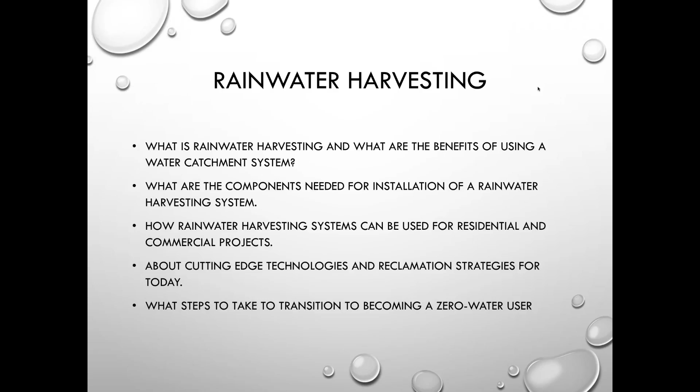That's one critical contaminant, but more so around the globe, it's really from deforestation and not letting the water percolate. So keep in mind that all those streets and infrastructure have a lot to do with it. Just allowing the opportunity to naturally progress back into the aquifer is a big deal.

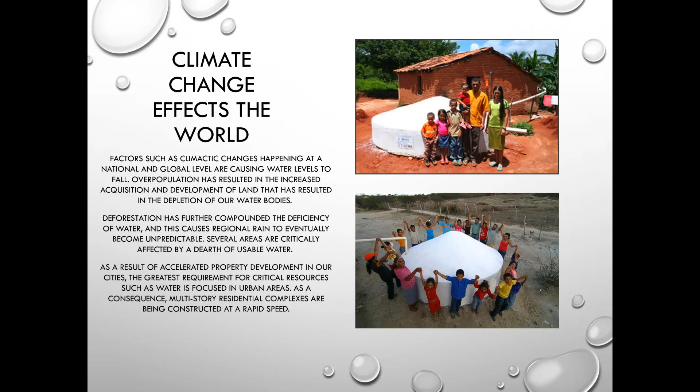So really the truth about rainwater is the strategy to maximize the natural resource, trying to minimize our environmental impact as much as possible. But the urban water situation today is more critical than what you see in rural areas, simply because of the massive infrastructure changes.

Down on the bottom, you'll see more of the factors, such as climate change happening, overpopulation, especially so much more towards India. Some of the more rural areas are becoming more urban, in places like Brazil, South Africa, and obviously in some of the densification processes here in the United States and throughout Mexico.

So multi-story residences and complexes have started to be constructed at a rapid speed. What I mean by rapid is, think about water that could naturally percolate by hitting the ground, puddle, and then saturate into the ground, versus hitting the top of a multi-story building, let's say 30 stories, and by the time it actually comes down the effluent pipes inside the building, it's running at a very rapid speed. So when we can collect rainwater or stormwater in those scenarios before it really goes into the aquifers, and reuse it on the same environment, it's a lot more conducive.

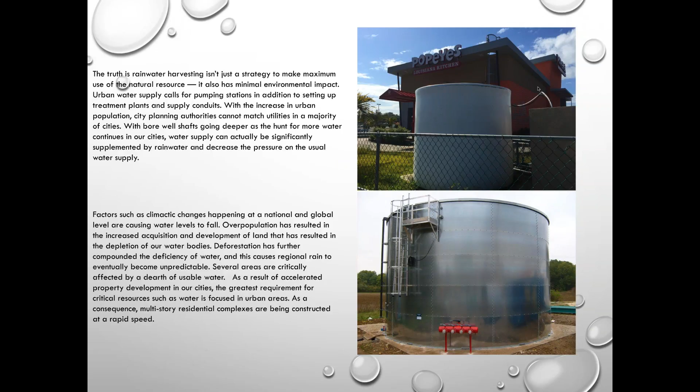So let me tell you a little bit about some of the knowledge that comes from this. When you look at the European Union, and specifically at countries where rainwater management has become a very natural everyday process, we could talk about Germany. Economics, centralization, government—everything's very similar to the U.S. The reason I bring up Germany is, since 1989 it's been the law there that if water hits your land, you either have to allow it to percolate slowly back into the natural environment, or you have to reuse it on your property. That's a federal mandate, which we don't have in the U.S., but you're going to see a lot more of this in municipalities around the country.

As Angela spoke about earlier, she lives in a part of the country that had an extensive 5-year drought, and now they're having tremendous flooding and runoff, which has created a catastrophic, earth-changing event—worse off, it's changed the naturalization of the property and the lifestyles people are used to. I live in the southeastern part of the country, and for about 6.5 years we had a really nasty drought.

So when you look at things like rainwater management, it's a very underutilized process, especially when you look at the non-drinking factors of it. The non-drinking factors would be more specific towards: it eliminates flooding or decreases it significantly, it decreases a lot of groundwater runoff into the stormwater that has to be treated. That in turn creates a little more or less strain on our drainage system, but less strain on the drainage infrastructure as we go through. So the groundwater levels and recharging really aid in enhancing the property.

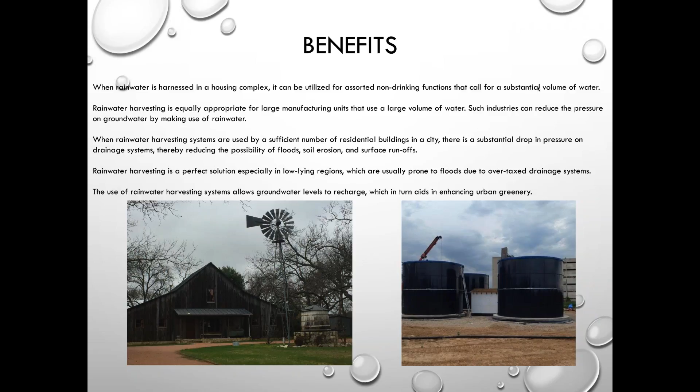One of the things I've always been asked about rainwater harvesting is what do I need to do it really well. Obviously if you're just using it for irrigation, a lot of people just catch water and go use it. I take myself back to something we talk about at work, the petticoat junction tank, which is just an open tank where you dip a bucket in and go about your business. Well today there's so many pesticides, herbicides, and other chemicals in the air that having something exposed really isn't a forgivable type of event.

So what we talk about is rain harvesting system components, having the right pre-filter. That's important because if you're going to have a tank, you want it to last a long time. The pre-filter breaks things down, leaves, debris, things flying in the air or hitting the substrate, whether it's the top of the building or house, and it washes that debris away. Today these types of filters are very efficient in what they do.

They don't lose a lot of water, but they flush a lot of that big debris away as it enters the system. You'll see on the PowerPoint, number 2 is the calmed inlet. A lot of people don't understand that part. A system is always going to have some level of debris that gets in the tank. Once it hits the bottom and settles, it creates an anaerobic material that's very good for the water, almost like a live bacteria. If it's not constantly turned up, it makes that layer on the bottom of the tank or cistern, and anything that gets in there continues to dilute down and break down through the water cycle.

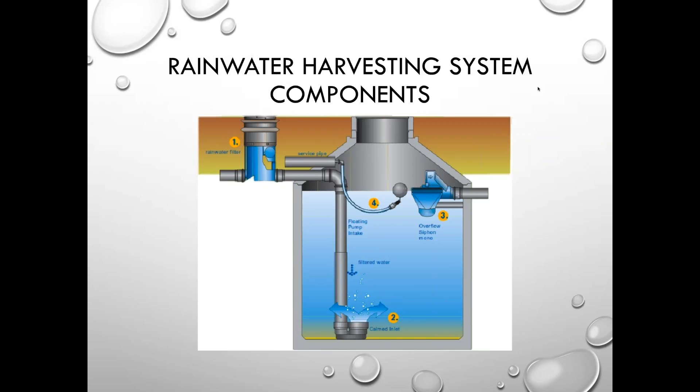Number 4, in this particular illustration, is a floating extractor, usually taken down below 500 microns. The water that comes through there floats beneath the surface but above the bottom, and it takes the cleanest water out of the tank all the time. That part of the tank is usually almost debris-free if you were looking at it under a microscope. So that gives you the opportunity to really get the best optimal water level out of the tank all the time. Our next slide is going to break that down.

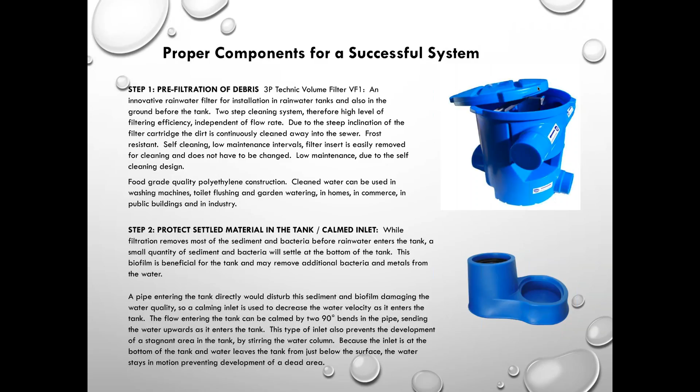As it does all the time, it constantly gives you oxygen in the water as it's splashing inside of the tank, giving you the ability to oxygenate the water. And anybody who knows anything about water knows the more oxygen, the cleaner and purer it's going to be.

The floating filter hose and the overflow siphon are a little different in this picture, so you can see them a little bit easier. You can see the floating extractor in the ball. The ball can be used in two different manners. A lot of times people will just let it float in the tank, especially on a shorter hose, so the ball will never touch the bottom of the tank, even if the tank were empty. The extractor wouldn't even lay on the ground—it would still float up off the floor.

Or two, you can tie a tether onto the top of it, making it so it always floats at a certain level in the tank. That way it maintains a certain type of environment. Both work well as you do water testing on a tank. The biggest ability is to make sure you use a calmed inlet so you don't have any extra debris floating around from the anaerobic stir.

In that protected overflow, or what some people call a siphon overflow, the pipe on the left-hand side literally sticks outside of the tank, and that's where you connect your drain pipe. As the water level gets too high, it overflows. On the right-hand side, you can see it's cut off at about a 45-degree angle, so it skims water as it comes closer and can take debris off of it.

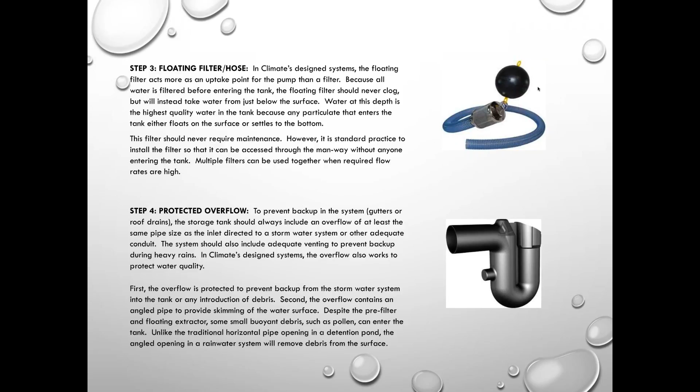So there's a lot of things that go into this type of technology. But again, it's a far cry from what we saw with the original ones, where water really goes into a concreted cistern that's not even protected, not even with a paintable surface. These are just going to give you some quick overviews of what tanks look like, kind of a snapshot of something in the industry today.

This is a regular steel galvanized tank. Some people refer to them as grain tanks. They basically have liners inside of them, and they can be made into all kinds of liquid storage—rain tanks. You can keep other types of chemicals or corrosives in them. You can keep oil in them. You can keep pretty much anything inside there as long as you've got a license for it.

As you can see on this particular one, it's just a clean looking tank, and they typically last between 20 and 30 years in the weather with very little maintenance. This system right here is about 2,200 gallons—easy off of a nice roof, clean.

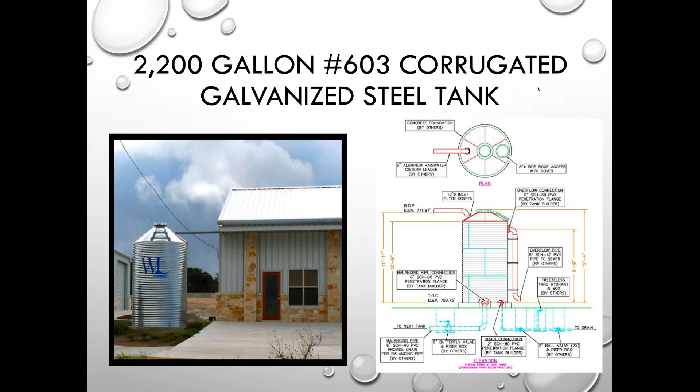Here's another look at another tank. It's about a 5,000 gallon tank. Again, it's a very easy installation. It's on an office—very clean, very sleek, very easy to work on, very low maintenance long term. And like I said, a tank like this typically will last between 20 and 30 years, as long as it's looked at by a certified technician on a yearly basis.

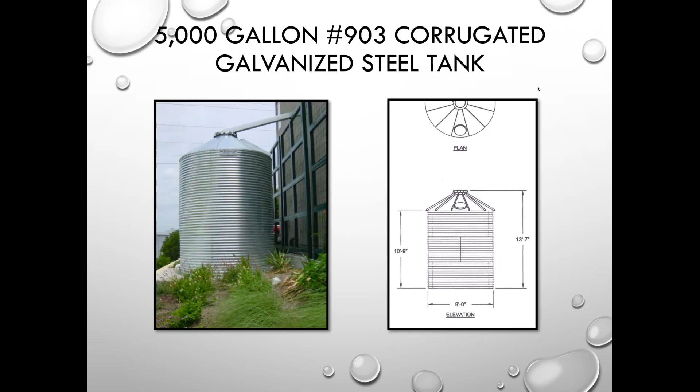Well, let's get more into the commercial and residential, because I think that's where the body of our phone calls are from. So commercial and residential—the biggest thing I want to talk about here is making sure you take the precautions to have locking lids.

Oftentimes, I have children—I'm sure that most people on the call do—and people like to climb on stuff, especially something that looks like a play toy. So you want to keep the lid locked, obviously, because of liability situations, and obviously someone can get hurt. But the biggest thing about it is not so much that—it's the breeding of mosquitoes and insects in the stored water. When this lid is closed, as the picture shows on the far right versus the far left, that tank literally will take in water and it can stay in there almost indefinitely. The light kept out of it keeps algae from growing in the tank, keeping it from having to be treated. Also, with the tank being closed, it has very little insects in there.

So why do people use these? You can see a lot of non-drinking purposes, which would be irrigation, car washing, laundry, toilet flushing—these are everyday common practices. You'll see from the middle picture in the slide, this is a typical scenario where a school will send us a blueprint and say, hey, we want to put a rain tank on, and we kind of want to do some stuff.

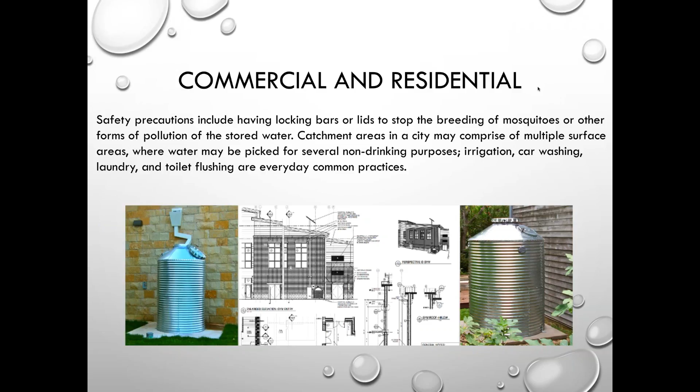These are also very practical for homeowners, and very practical around the office. You can come over and fill your water up and water all your house plants all you want. House plants and landscape plants love rainwater because it's virtually chemical free and debris free, so it's very easy for them to use.

Let's talk a bit more into the depth of technologies. We're back to square one on the left, where this young lady is doing something she has to do every single day, which is hand pump water out of her concrete cistern. These cisterns are built from the ground up on her property, every facet of it. This is one of my favorite types of projects to work on around the world, and it brings me back to the root of what we really do this for, which is helping lower the ecological footprint of the way people use water around the globe.

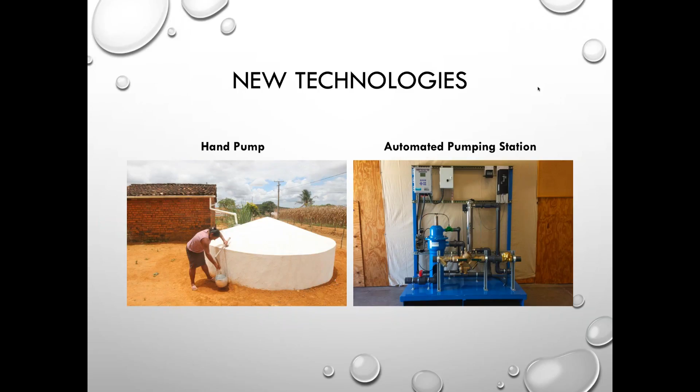New technologies sometimes are still very simplistic. These are more of the high-end technologies around today. This happens to be a brand, and there are lots of them out there. This particular one I'm really engaged with. We actually install a lot of them and talk to a lot of clients about them. Very popular product, and what it does is take water in through the cartridges.

What's left could be live bacteria that still exists, and it will be eradicated inside the UV bulb. The coolest thing about this new technology is that it uses very little electricity.

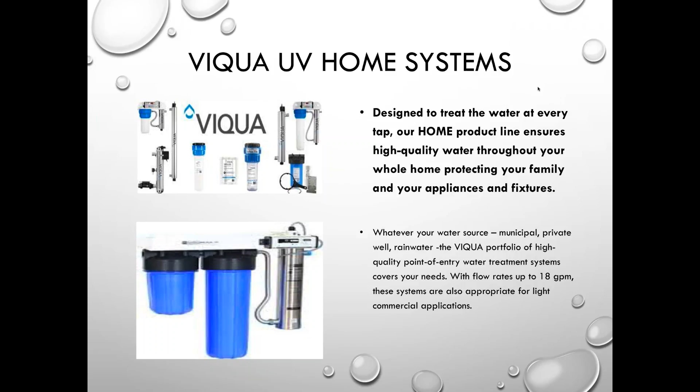This will show you a little bit more of what the professional series looks like. The professional series really has a longer lifespan, the bulbs last longer. The little meter on the front of the black box that says VIQUA on it is actually a countdown calendar that, when you plug it in and it becomes activated, tells you to the day when that bulb should be replaced by manufacturer specification. So it's constantly monitoring the system.

This system's a little bit bigger. As you can see inside of the silver tube, that's where the UV bulb is. Very safe product, and works extremely well. Reason why I bring this up is because this is not necessarily new technology. It's new to this century, but it's not new. Its newness is it's become very affordable on the market today to add to your rainwater system.

The reason why I say this is because a lot of times we have conversations with clients and people will say, well, how much rainwater storage should I have? And the ultimate answer is no matter how much you have, you're always going to want more, which is a really cool thing. So you always want to size your UV system for all practical uses, not just the uses that someone would have originally.

These cartridges on this side are basically the same, except they're larger, so they take in more volume because they need to have more volume through the bulb. Just make sure that the gallons per minute, the GPMs, are actually kept up. As you get more water inside of it too, it gives you the ability to have more of the filtration surface area inside to attack more of the water quicker. So not only does the filter become more efficient, it lasts a little bit longer.

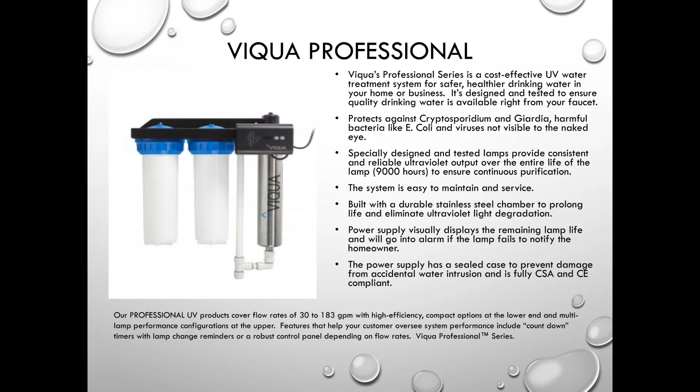Again, you always want to check with your manufacturer to find out what the specifications and recommendations are, but these filters are basically meant to last no more than 90 days, and the bulb's usually around a year. So that's a practical application for most people.

Some of the other new technology that's out there: instead of having a concrete tank under the ground, now they call it FRP, which is fiber reinforced plastic. Most people commonly refer to it as fiberglass, although some are not fiberglass, some are metal. There are other plastics out there as well. You can see, starting on the left, kind of what that symbolically looks like through that schematic of what a tank looks like under the ground. That might be at a local school, might be at a local office.

It can be used for stormwater collection. It can be typically used for fire suppression tanks, irrigation, potable water, which is drinking water. They're very corrosion resistant. They can be made into NSF standards for potable water, which is NSF 61. There's all kinds of things that you can use these for, but they are customizable and you can use them for a lot of applications.

So the building on your left kind of shows you the rendering. The building in the middle actually shows you the practical application. And then the one on the right, I put that in there so you can see why. Well, a tank like this, once it's buried, it has to be kept from ballasting, which means kept from floating up, kind of like a submarine. So you've got to anchor it to the ground. There's a lot of technical things that go into it, and again, this is a very professional, very certifiable type of job of installation that people conduct. But it is a big part of rainwater management.

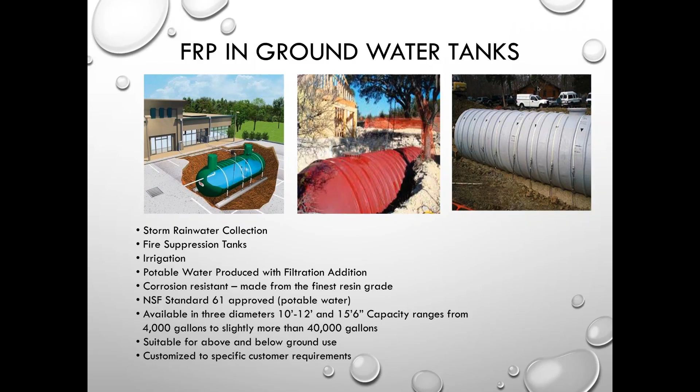Here's another type of containment vessel, for water. Typically, a lot of people like to put these for irrigation. You'll see these rainwater pillows, especially a lot in South America, used for irrigation purposes, where you may not be able to have a confined space for a regular conventional tank. In our practical experience, the last several we've built for clients have been in places you literally couldn't get other materials into, so these were brought in hand carried or by animals. A typical crawl space installation, you see a lot of this in parts of the country that don't have full basements, or under decks, like in the North Texas hill country where people put them under their deck to keep them out of the light. These flexible storage vessels are very practical.

We were having a conversation a couple days ago with one of our newer dealers, and we told them, I said, you know, one of the biggest things that you'll see from this...

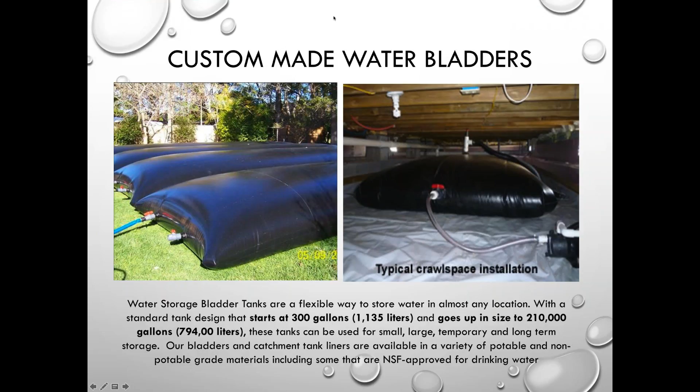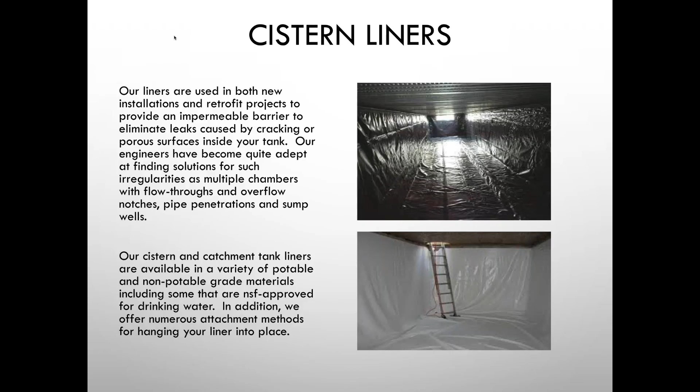As we go through, the next part is a better look at what liners look like. Why do we show you this? Well, the picture on the top right is an opportunity where the cistern is built underground, then a lid is put on top and it's retrofitted. In this case, there's actually a soccer field on top of this cistern. It's closed off at the end, and the application is that it fills up with rainwater and is reused totally for irrigation. The bottom shows a different situation where the cistern is inside a building in the basement, built in a concrete basement. A potable water liner is put in there, and through UV, the water is taken back out and used throughout the entire facility, a fairly large recreational area around a resort. There's a lot of practical applications and vessels that can be used with natural rainfall.

So how do we make this transition to zero water? I think the big thing to talk about is that water is becoming noticeably scarcer and more scattered. A lot of it could stem from climate changes, or from changes in infrastructure. Certainly as wind effects and the way cold fronts and warm fronts collide change due to urbanization and massive skyscrapers, all of this creates different opportunities. I'm not a hydrologist or a meteorologist, but one thing that stands true to me is we are inevitably going to change. So let's look at the technology, let's look at the practices that have worked for centuries and continue those so we don't have as many bottlenecks in the process.

One would be collecting rainwater. You can use it in a pit, a tank, an underground cistern, or a rain barrel. One of the things is, plants and animals like filtered water, meaning filtered by the good Lord, not necessarily filtered through a canister. Rainwater is a perfect illustration. It doesn't matter whether it comes off a roof, a parking lot, or a piece of metal or plastic.

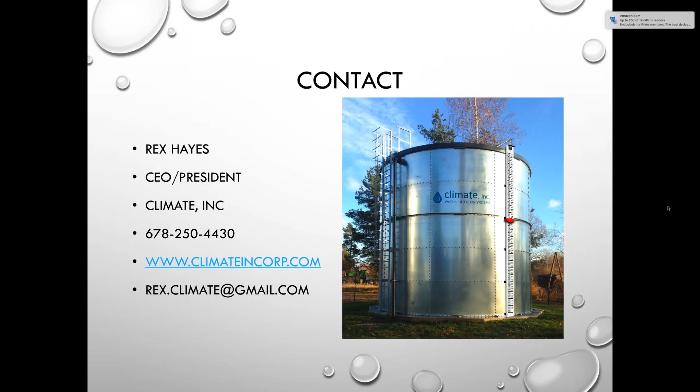Yeah, absolutely. So John, the rest of your question, I think too, Angela just gave some really great examples of it. So it's really dependent on irrigation, whether you're using an irrigation controller system versus a drip irrigation system. For drip irrigation, a lot of people use the rain barrels I showed you, and by the way, that's 4 out of like 48 different varieties that we manufacture.

So what's kind of cool about them is those rain barrels, just like the rain filters and stuff that you can get through climateincorp.com, all of those products are sold through a vast network of dealers. One of our dealers is on the call today that does a great job of rainwater harvesting in Texas.

But when you look at that type of scenario, drip irrigation is done a lot off of rain barrels also, because you can put them on downspouts. They're very low in servicing and very high in yield.

The biggest thing that we laugh about at the office all the time is when people go, well, this rain barrel looks big. I'm like, well, I'm kind of big and I can stand inside of it. And they go, see what I'm saying? I go, it won't be big after your first half inch of rain because it'll be overfilled, and then you're going to really want to know why you didn't have another one.

So they're really easy to connect, but you can use them for drip irrigation. You can just stick a hose right on the bottom of it and put a drip irrigation hose on there and turn it on and let it fly.